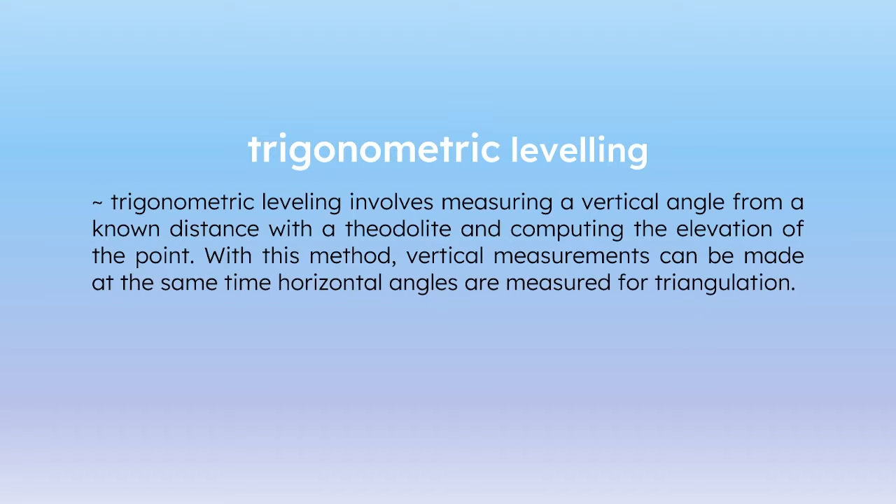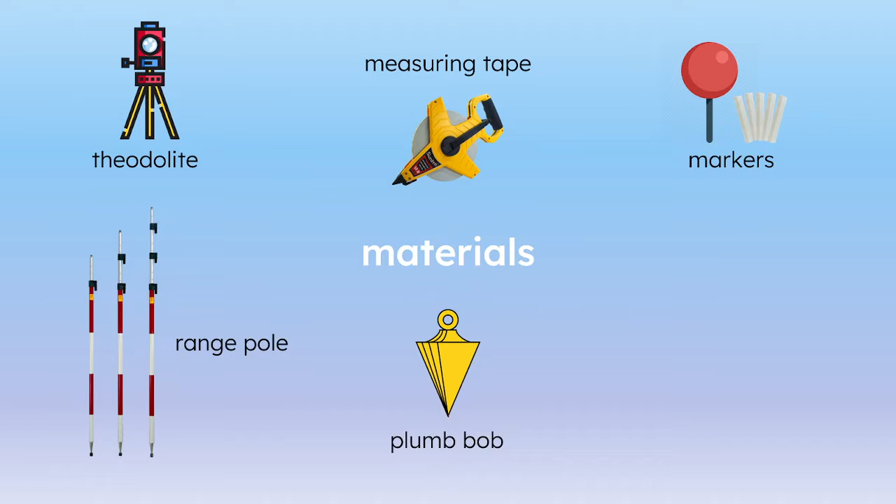Materials: theodolite, measuring tape, markers, range pole, plumb bob, and leveling rod. The objectives of this fieldwork are to acquire and develop the skills of determining the vertical distance, elevation, and height of a remote point by applying trigonometric and related analysis, and also to develop the skills of reading vertical angles using theodolite or total station.

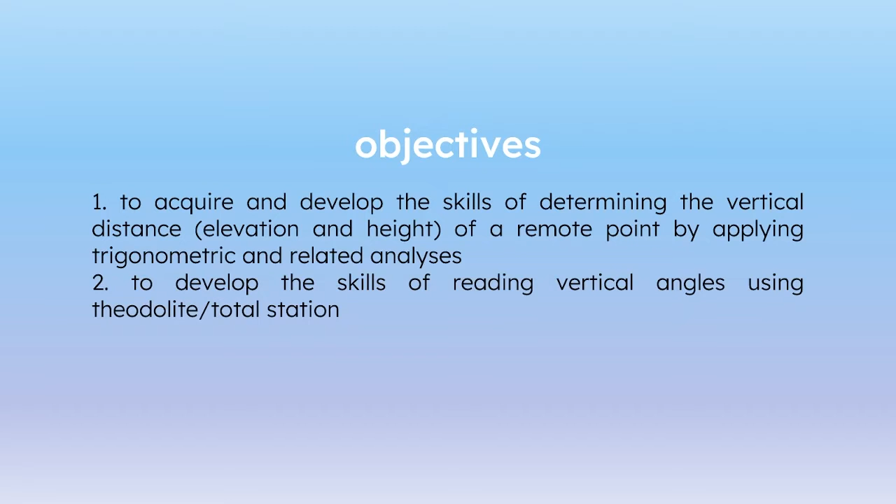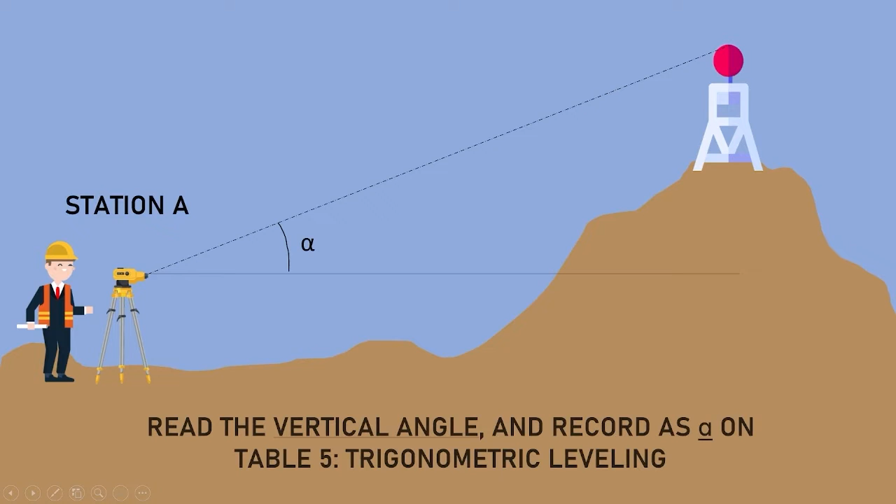Procedures: consider this as the location assigned. Set up the theodolite at a convenient location and call it point A. Using the telescope, take sight at the topmost remote point. Read the vertical angle and record as alpha on Table 5, Trigonometric Leveling.

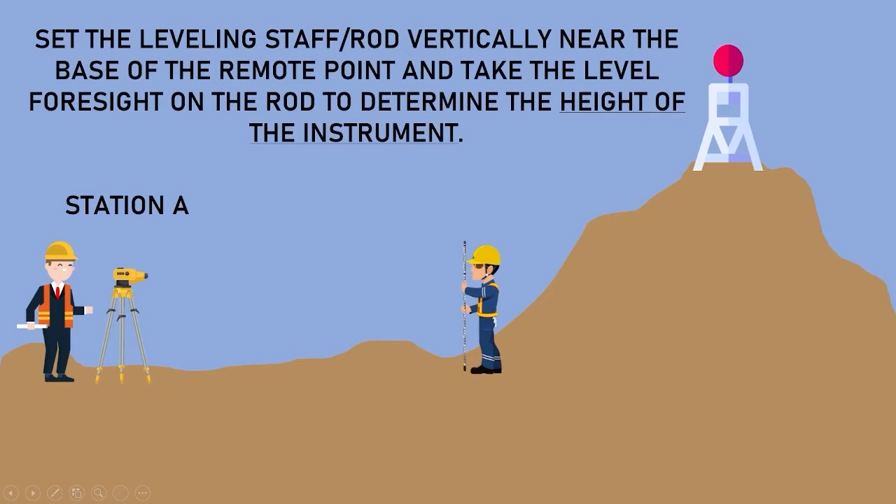Take another sight for the second trial to determine the instrument's precision. Calculate the mean of the two vertical angles, or the angle of elevation, not the zenith angle, of the specified point from the first station. Set the leveling staff or rod vertically near the base of the remote point and take the level foresight on the rod to determine the height of the instrument.

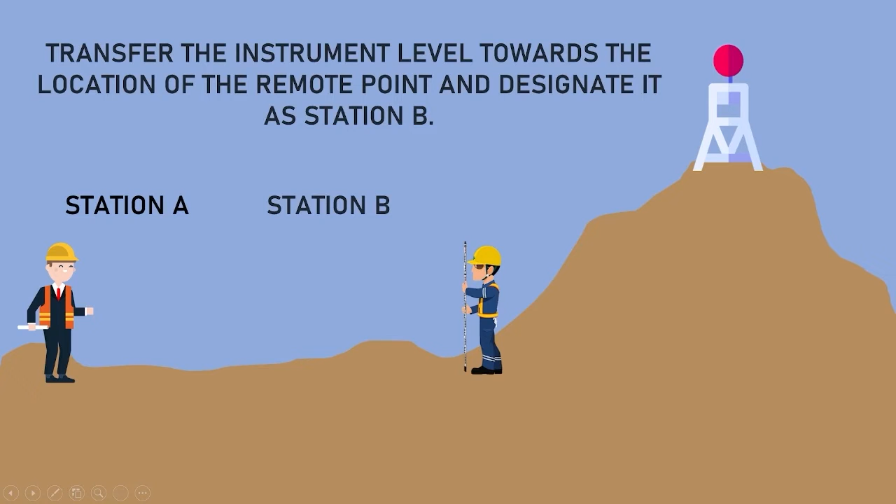Transfer the instrument level, theodolite, towards the location of the remote point and designate it as Station B. Then measure its distance by taping from its initial position or Station A. Record this as distance AB. After centering the bubble of the instrument level, sight at the same topmost remote point sighted before, twice using the telescope, and record as beta on Table 5 Trigonometric Leveling. After recording these two observations of vertical angle, calculate the mean.

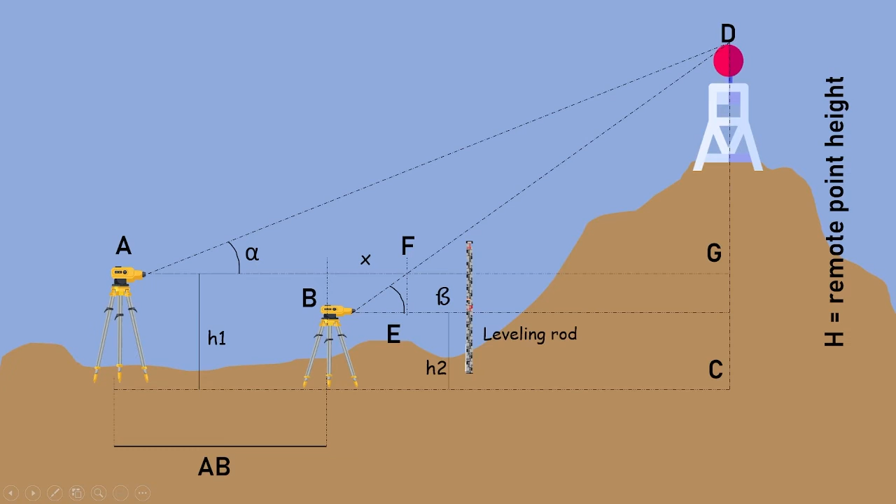Level the telescope while at B and get the height of the instrument by sighting the same leveling rod near the base of the remote point. Analyze. See figure below. The right triangles formed to determine the height of the remote point. This fieldwork will not consider the effects of combined correction of Earth's curvature and refraction.

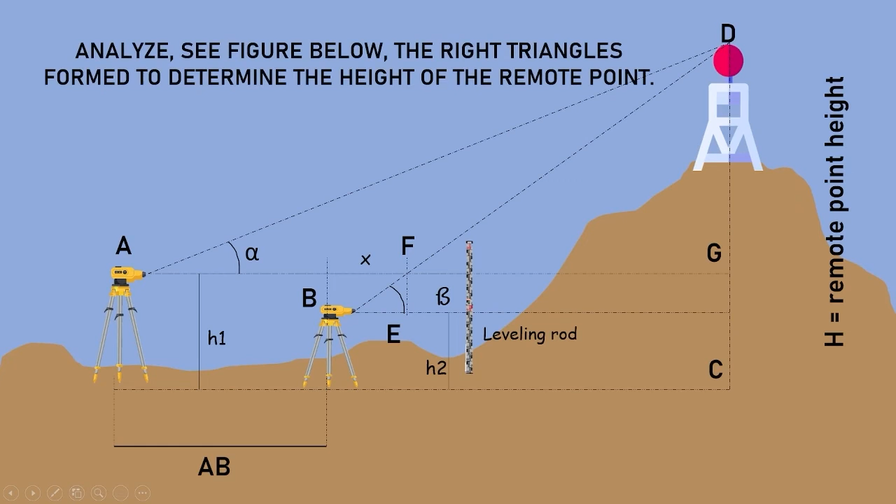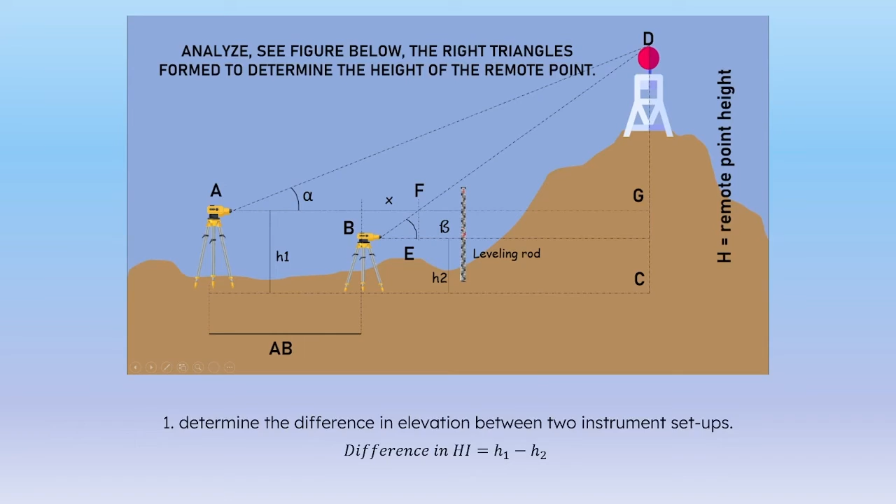Analysis of the figure. For the analysis of the figure above, first, to determine the difference in elevation between the two instrument setups, we will have the equation difference in height of the instrument is equal to h1 minus h2. Consider the triangle B'EF, then solve for the distance x using the tangent function. Tangent beta is equal to h1 minus h2 all over the missing x.

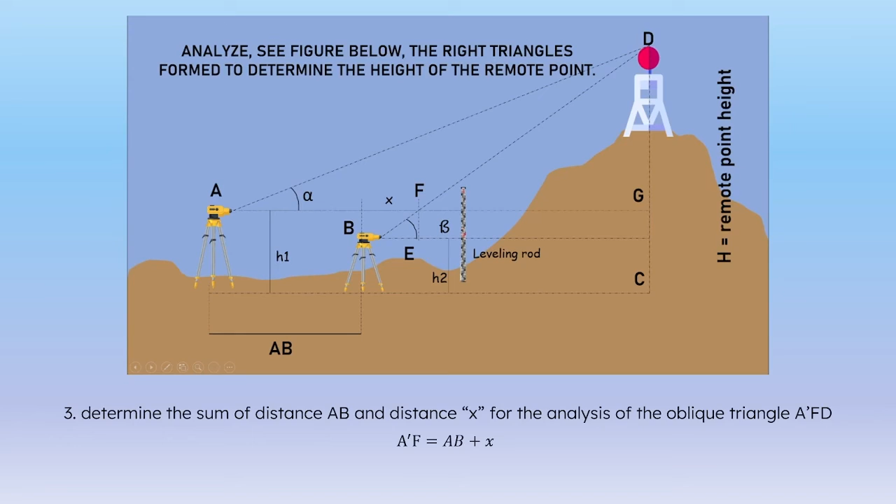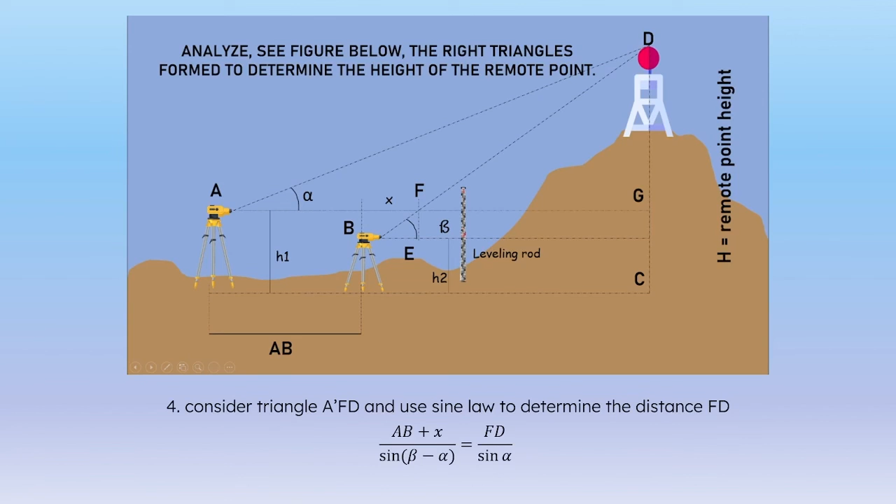Then, to determine the sum of distance AB and distance x for the analysis of the oblique triangle A'FD, we'll have the equation A'F is equal to AB plus x. Consider triangle A'FD and use sine law to determine the distance FD. You can use the given equation below in order to determine the distance FD, where AB plus x over sine (beta minus alpha) is equal to FD all over sine alpha.

Consider triangle FDG and determine the height of the remote point DG. We can use the given equation below in order to determine the remote point DG, where sine beta is equal to h minus h1 all over FD.